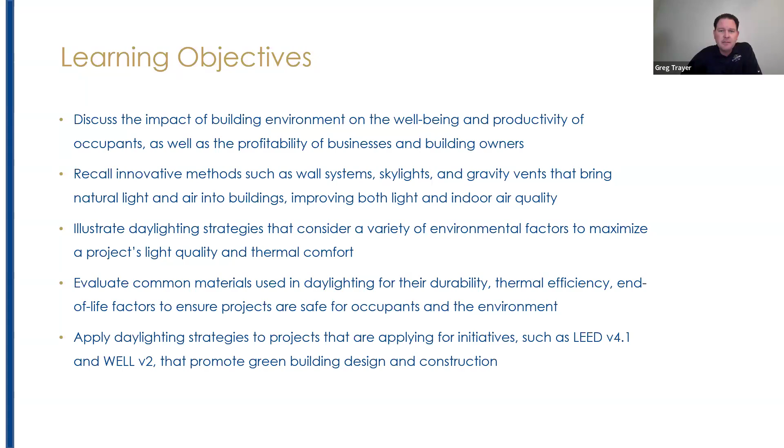Of architecture. So some of the learning objectives of the course: we're going to go through the well-being of the occupants and why that's important. We'll go through different methods of daylighting, from wall lights to skylights to canopies. We'll talk through different strategies and the materials that are commonly used with daylighting, and then lastly show the application, where and how it's used in day-to-day buildings.

As far as an introduction, when a building's first getting designed, a lot of the time it's focused on how big is the building, what's the layout, what technical stuff am I going to do, how do I weatherize that building—that's a lot of the primary concern. But what often is overlooked is the actual occupants of the building, whether they're working, shopping, or educating day in and day out. It's often thought of as wishful thinking or impossible due to the budget.

But when you think about the well-being of the occupants in the design process, it affects so many people, and we'll go into those benefits. Not only the occupants, but the owner, the business itself, the operators—there are so many benefits that a lot of people don't realize come from being in a properly lit space.

I think we would all agree nobody wants to go into work every day in a 10 by 10 space that has no windows, no ventilation, no fresh air. You want a nice, pleasant place to work in, and that's a lot about what this talks through. So as far as the occupants in the building, that availability of natural light, air, and ventilation are all things occupants want day to day in their workspace. So that's the main portion of what we'll go through now.

So there's a lot of numbers in here. Obviously, I wouldn't expect anyone to remember or memorize all these. Really, the big takeaway is the variety of benefits that come from natural light, and vice versa, what the lack of natural light does.

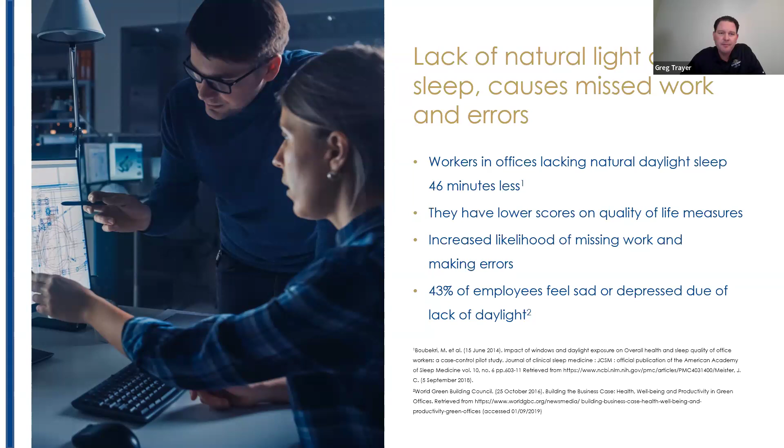When they've measured quality of life of employees, you'd be surprised how much the environment they work in contributes to that. And that's really tied to the impact of the circadian rhythm.

So, people say, why is the sky blue? Well, there's a number of reasons the sky is blue, but the sky being blue helps set your circadian rhythm. There's a reason your phone has a nighttime mode, right? It darkens it, takes it to more of a yellowish, orangish hue. That's your eyes and your body telling you it's time to wind down, time to go to bed. There's a reason casinos don't have any natural light in them, so you don't know what time of day it is, and it messes with your system.

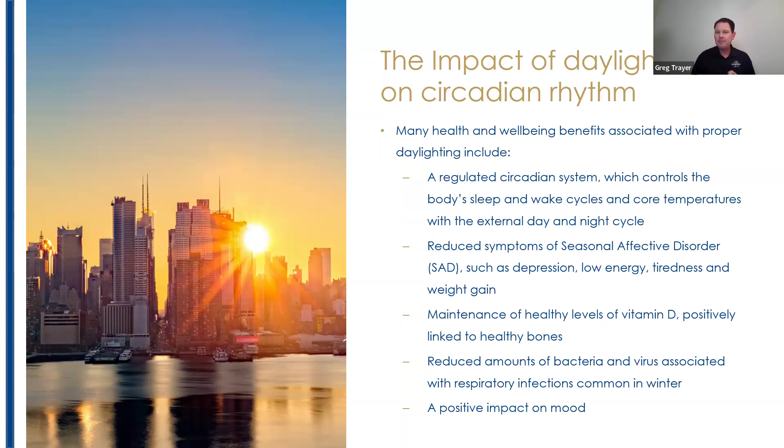So being on that right circadian rhythm is important to your day-to-day health and well-being, and working and living in natural light day in and day out will help keep that natural circadian rhythm in balance, which is really important to your health and well-being.

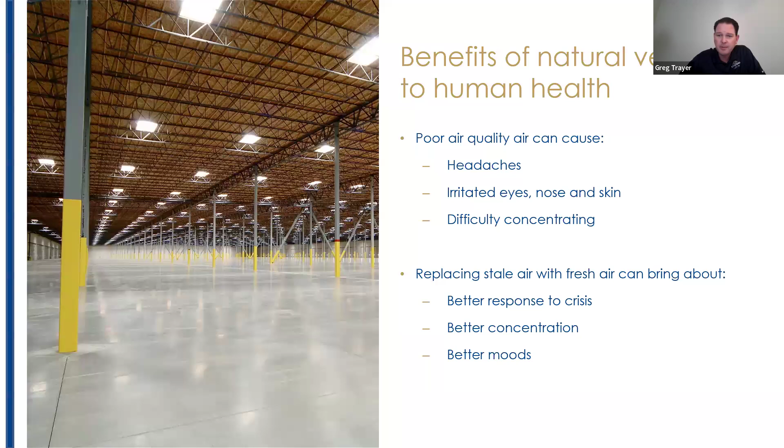The studies show that when you talk about air quality - so we talked about light and air - you not only have natural light, but you have the ventilation that comes too. When you're in a space that doesn't have quality air, you're more prone to headaches, you get irritation in your eyes and nose, you have difficulty concentrating because of dry and stagnant air. When you replace that with fresh air, you have a better response to crisis, you concentrate better, better moods. You have places that are really important, like hospitals, that have great air circulation and great light for a number of reasons, but one of them is it's really important that everyone is responsive and concentrating in those important environments.

And then also from a natural light and ventilation standpoint, from the school system - they have a variety of tests out there, whether math tests or reading tests, students are doing better, doing it faster when they're in spaces that are well lit and well ventilated.

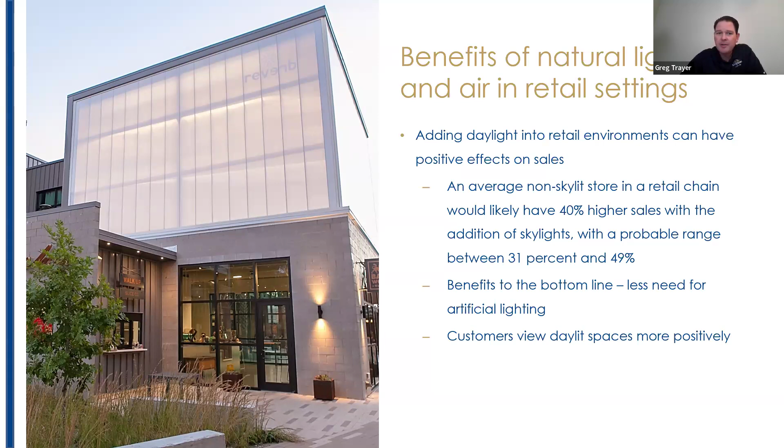So things you wouldn't probably think of when considering a retail space, but that does come into play. I know there's probably a little repetitiveness there, but it's important to understand that whether it's a school environment for students, a retail environment for shoppers, or just your workspace, across the board the benefits of well-lit and well-ventilated spaces are extremely important.

Going back to the original point, this is often overlooked at the beginning of the process. Our goal is to make sure you are educated, and your customers are educated, on all those benefits that aren't often thought of.

So the next section just goes into how do we do that? How do we bring light into these spaces? What are the things we should be thinking about?

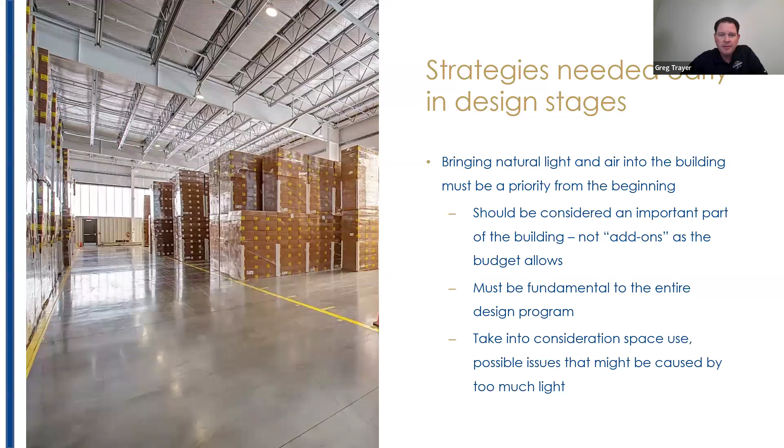Bringing that light and air into it needs to be a priority at the beginning, part of that early design phase. Later, as we wrap up, we can talk about some of the assistance out there for incorporating that into the fundamental design of your building, and the ways to do that.

So you have translucent wall systems. We're going to talk about the different types of applications. Your wall system is pretty self-explanatory — that's going on any of your four vertical walls, as opposed to canopies or skylights, which we'll get into later. With translucent panels you can have unitized panels, and we'll get into specific options later; this is more about the application. So where can I use it? First would be a wall system.

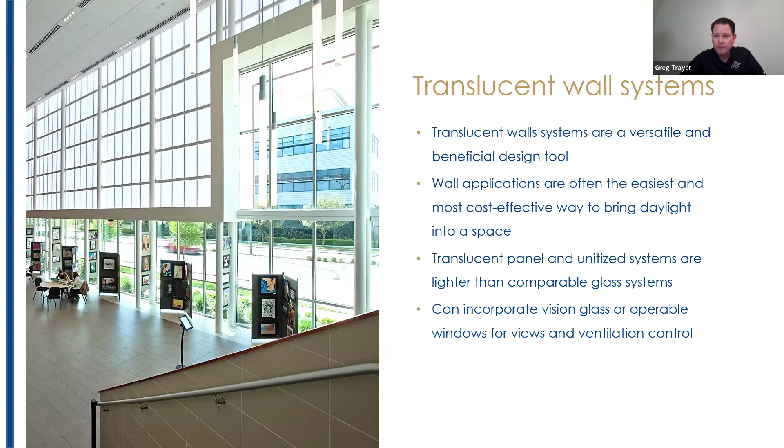Second would be skylights. That's probably the most common way people think of how to get daylight into a building — that seems to be the natural default. But as I just mentioned, wall lights are actually probably the most cost-effective way, and probably the most overlooked. Skylights are just the most natural way.

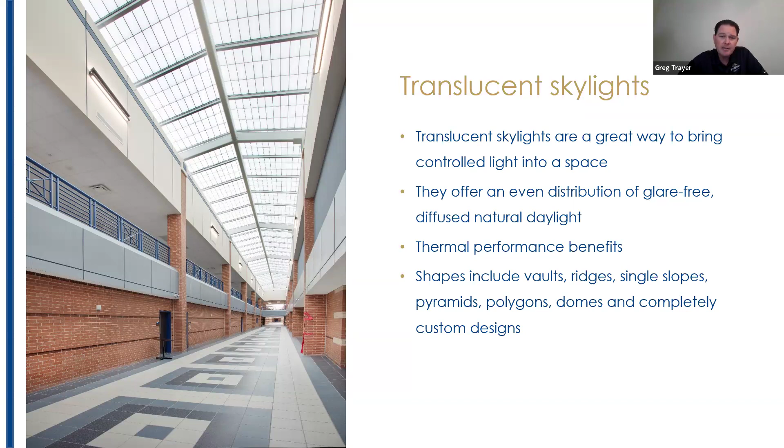Naturally, skylights are above you. There's a variety of options you can look for — vaults, ridges, single slopes, pyramids. So there's a number of aesthetic ways you can get light into the building using a skylight.

The other way is canopies and walkways. A lot of people think about the inside of their building with a skylight and a wall light into the building, but what's often not thought about is the entranceway or walkway into that building — out front of hotels, or at an airport when you're waiting to get picked up. All those places aren't actually inside the building, but are still connected to it.

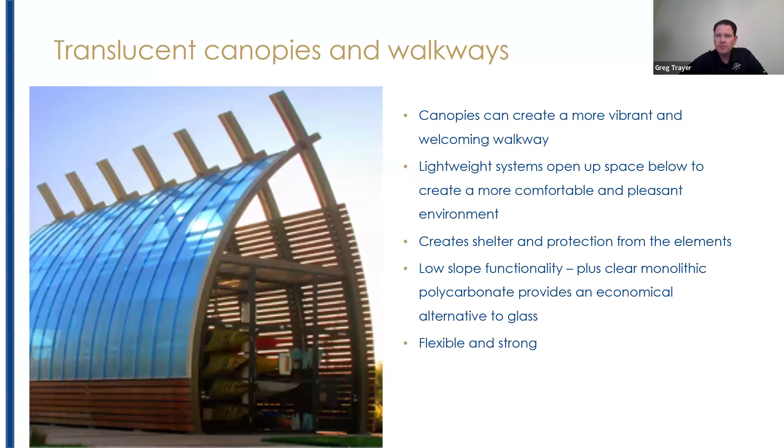There, it's actually less about bringing light in and more about managing that light in the system. But there's a variety of design options out there, and those are the three main ways you'll hear daylighting referred to: side lighting or wall lights, top lighting or skylights, and canopies and walkways. Those are the three major categories of daylighting you'll often hear referred to.

And then the other portion on top of daylighting is the natural ventilation, right?

So there's wall and roof vents. You have some that are operable, some that are inoperable. There's a variety of ways of getting natural ventilation in and out of the building, ensuring proper air quality. Having operable vents is important if you want fresh air, but if the air quality outside is bad, you want to block that out. So some people think it's just about getting air into the building, but often it's about blocking the wrong air from coming in. From a safety perspective, it could also be around smoke hatches and items that let air out due to a potential safety issue within the building.

So natural ventilation is the second part of that, and that's where it incorporates. In this section, we're going to talk more about what to consider and think about with natural light and ventilation.

So, daylighting strategy. I think we recognize that daylighting is still a bit of a niche area of expertise. When you talk about strategies, there's a lot of science that goes into daylighting - how to position your building, how to get the right light at the right time of day, how many foot candles, which is an expression essentially describing how much light is coming into the building. I'm not going to spend too much time on the details here.

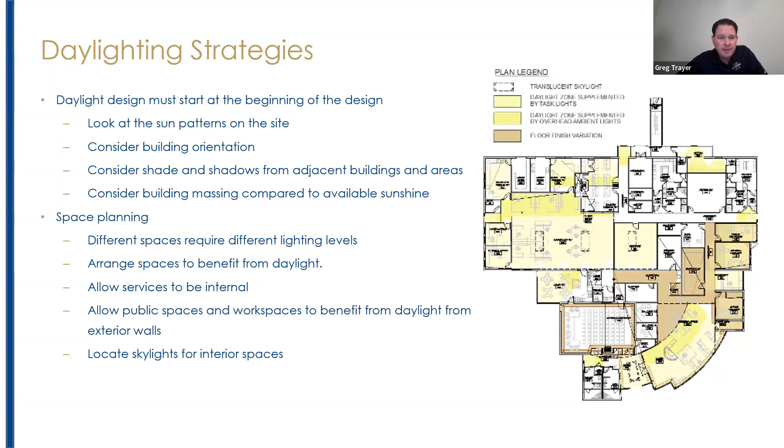The important thing to know, which we'll talk about a little later, is there are resources out there to help you. Some people are daylighting experts and some are not, but they want to learn more and incorporate it in. There are resources to help you as an architect or designer bring in strategies and daylighting studies. We'll talk about that a little later, but just know there's a lot that goes into it around the space and position that people don't think about, and assistance can be provided. There's also a variety of daylighting strategies.

I wanted to talk a little about how to do that, because the common way to bring light in is a window - a glass window that lets light in and gets you a great view. Then there's translucent daylighting, which gives you all the light and other benefits without the view. There are pros and cons to both.

A lot of people think it's one or the other - either you use transparent daylighting, with glass giving you that view and everything else that comes with it, or translucent daylighting, which gives you natural light without the glare and the view. But the reality is there are strategies where you can incorporate both. That's an example here of a view zone down below, because at the end of the day, people like to look outside and see trees and birds and all those good things. However, too much light can also be negative.

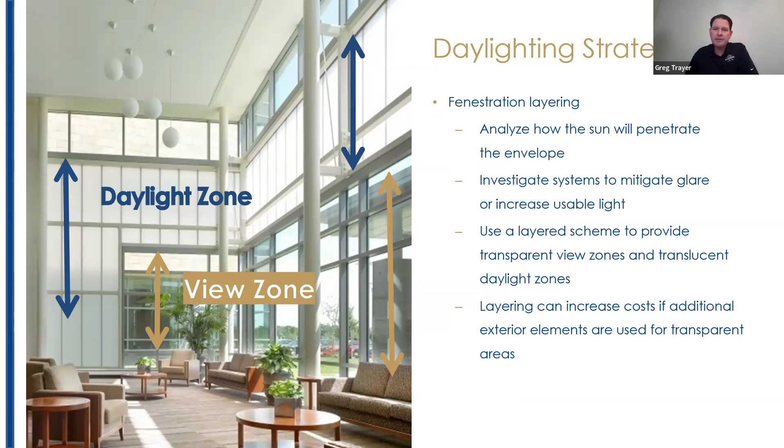So this is just showing where you can actually incorporate both transparent and translucent daylighting into your building with a variety of strategies. This talks about the modeling portion, so I won't spend too much time on it, but there are daylight modeling tools out there.

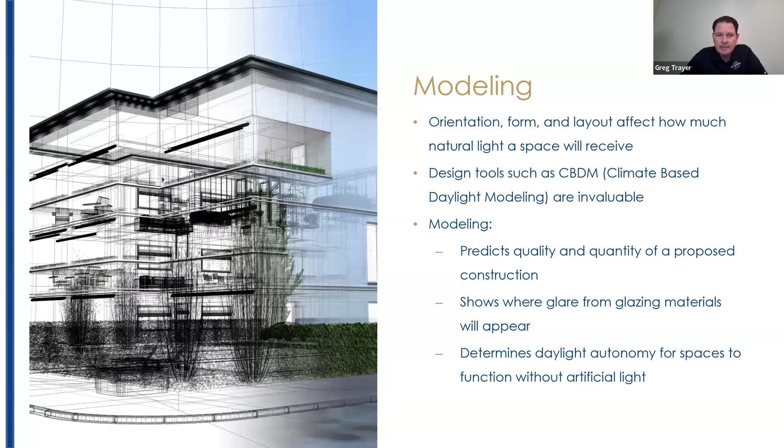There's some you can go out and find on your own - we'll talk a little later about that. There are obviously companies that can help and provide that for you as well. There is daylight modeling studies, software, and tools out there that can be used to really optimize the right light in your building when you're designing it.

The main reason translucent daylighting started becoming popular is because, as I mentioned, the default is transparent - the default is glass, and there's a lot of benefits to it. The downside is things like glare and heat spots. It's like walking in the mall and standing in one of those kiosks getting light, and it's just a heat spot right there. If you're in an office trying to work, you get glare on your computer, glare on a TV. So there are pros and cons to it.

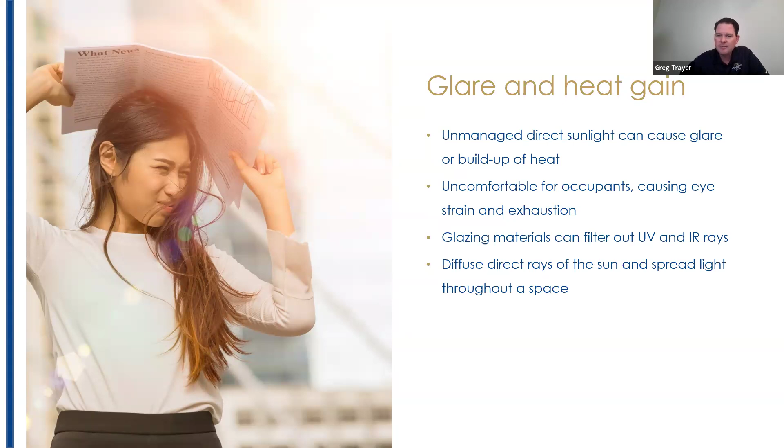The downside to transparent is often tied to that heat, that glare, those sunspots that are difficult to navigate. The main real benefit of translucent daylighting is that it takes the light, diffuses it, and evenly spreads it throughout your building. So you don't get those heat spots, you don't get that glare, you don't get those sunspots. It makes for a still well-lit space that feels like you're getting natural light, but without some of the negatives that come with direct sunlight.

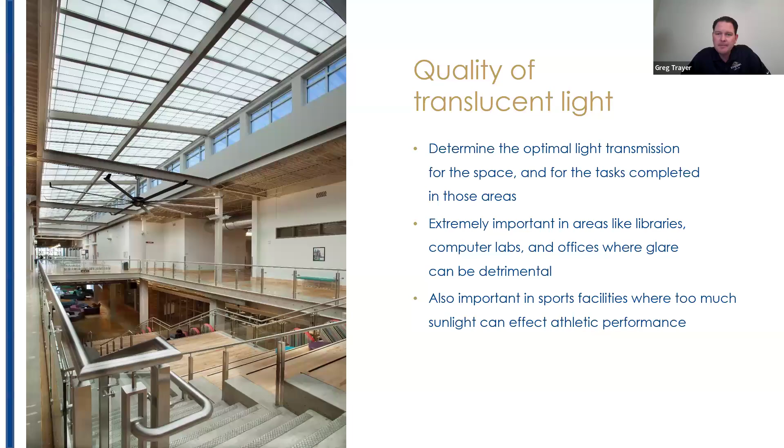So insulated glass is the most common one. Years ago we've gone to double pane glass - that's the standard now, so two or more panes. The benefits of glass is that it allows the occupant to see outside, see the scenery, see everything that's out there.

The downside is the glare, which can be detrimental depending on how you're using that space. Glass is pretty long lasting - there's maintenance needed, but it's a long lasting product. Standard glass is recyclable, and recyclability has always been important, and becomes more important to everybody - owners, occupants, architects - making sure we're leaving this earth better than when we came, and having recycled content is important. So standard glass is recyclable, but when you get to low-E glass, that generally cannot be recycled.

The second option, moving into the translucent space, is fiberglass or FRP. You'll also hear this referred to as a sandwich panel. It's actually two fiberglass sheets bonded together to an aluminum I-beam structure. You can see in this picture that grid pattern of squares or rectangles, probably 12 inches by 24 inches. Imagine an aluminum beam with structure every 12 or 24 inches, and you adhere a sheet of fiberglass on the bottom and on the top - that's why it's called a sandwich panel. What you're doing is reducing the glare, reducing hot spots, but still letting the light in.

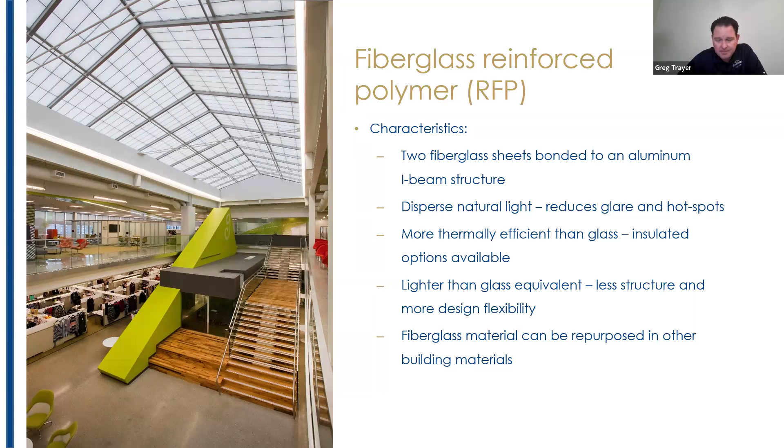It's more thermally efficient than glass, as you might expect, and it's lighter than glass. The fiberglass itself can be repurposed, but the actual material is not recyclable.

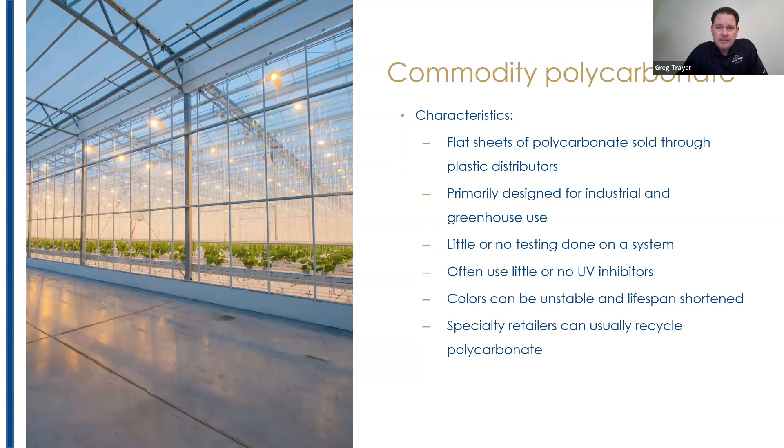It's got a niche use, but the more common type of polycarbonate is the architectural grade polycarbonate. As opposed to one single thick panel, it has a more similar appearance to that sandwich panel - it's actually a two panel system. You'd have a 10 or 12 millimeter piece of polycarbonate, a metal frame, and another 10 or 12 millimeter thick polycarbonate. So it's a two panel system that creates an air cavity in there.

The reason for that air cavity - usually that panel system is somewhere between 3 and 4 inches wide - allows for some sound control, some insulation, so it allows a bit of flexibility. This product is used very similarly to your fiberglass product - similar applications: wall lights, skylights, canopies. They just offer a different aesthetic look, different design options and flexibility. Polycarbonate generally adds more design flexibility. The other thing you'll hear is that polycarbonate is essentially a fancy name for plastic - it's plastic, and a lot of times people in their mind think plastic is cheap.

Polycarbonate is actually used in some pretty high technology items like eyeglasses, headlights, and bulletproof glass. So some people mistakenly equate polycarbonate or plastic to being cheap or not durable, when in fact it's quite the opposite. So those are your four main options for daylighting: the transparent, which is your glass, most common, and then the translucent, which is your fiberglass and your polycarbonate.

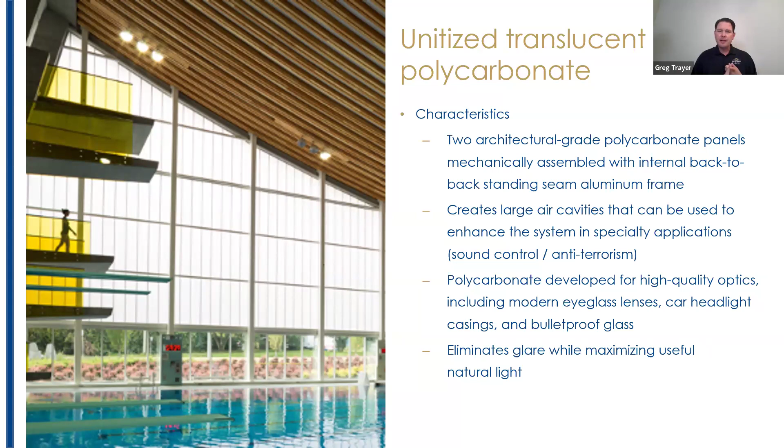What this allows, because those two panels can be removed. So fiberglass, that sandwich panel, when manufactured and sent out, that is one piece—two panels adhered together, making it one piece of a system. So you cannot do this, unfortunately, with fiberglass, but you can do this with polycarbonates, where you can actually remove the outer layer, the outer skin of that.

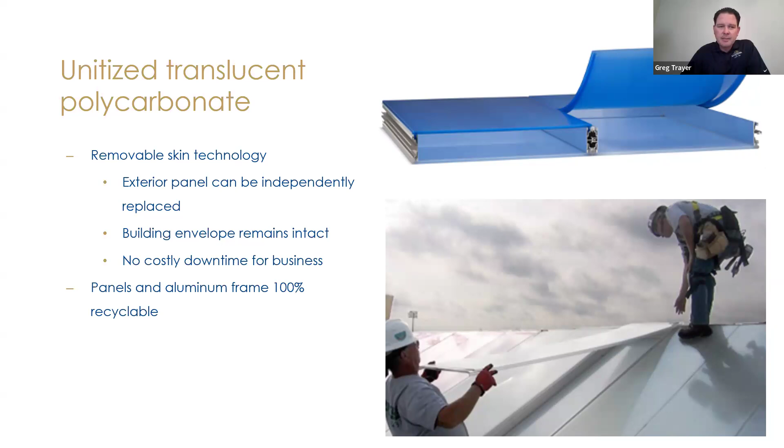So the translucent system—we talked about there's polycarbonate and there's FRP, and some of the benefits that come with that. You can get long spans. You do have insulation options, right? There is the ability in those panels—they are either a sandwich panel or a two-panel system that you can put insulation in there.

Now, the whole point of a translucent system is to let daylight in. So the more insulation you put in there, the less daylight comes through. So it's an option, but you also want to make sure you're balancing the reason you're using translucent daylighting. But there is, at the end of the day, flexibility, which is ultimately what you want. That includes not only insulation, but sound transmission.

So you could have a building, if it's some kind of music or dance space, if you're sharing wall space, you could have one wall with increased sound transmission blocking that you don't have to have on the other wall because that wall may be too open. So you have design flexibility around insulation, sound, also safety and security. These products can be used where you have to pass certain tests, like 5-minute forced entry if it's on a military base. So these translucent systems give a lot of flexibility for any type of building you might be designing, whether that's sound, security, or insulation. There's a lot of options out there.

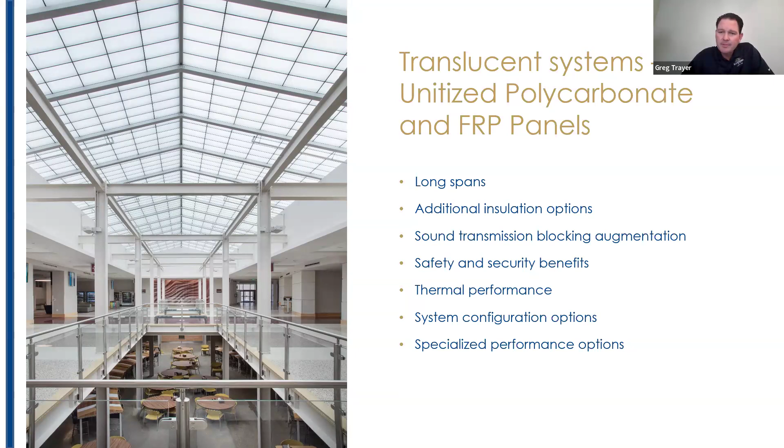You can get quite long spans out of these, and aesthetically people like that because there's less break, fewer supports. Also from an installation perspective, it helps. With the polycarbonate, you can span up to about 40 feet; with the fiberglass, you're looking at about 20 feet. What kind of horizontal supports you need will vary based on where you install, with wind loads and snow loads and everything else. So there is some horizontal support on the back, but from the actual panel, before you see any panel break, you could get runs with poly at 40 feet, and with fiberglass to about 20 feet.

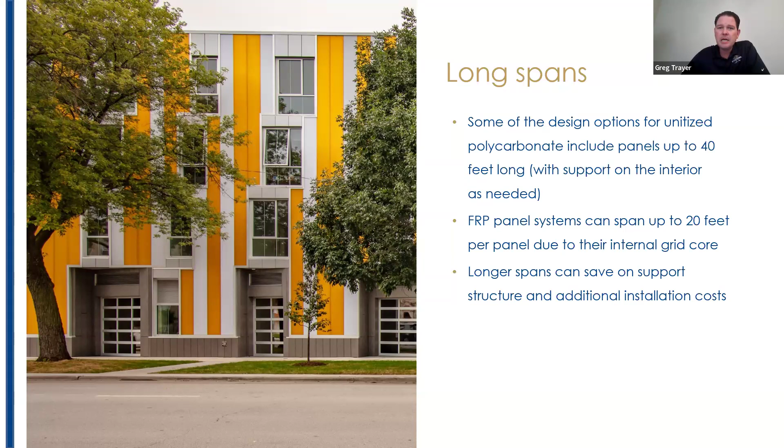A lot of people ask about our R value. Translucent daylighting does not use R value, it's a fenestration product, so it actually uses U value, which is essentially just the inverse of R value. You'll see a lot of U values for translucent daylighting between 0.2 and 0.3, which if you convert that to R values is around a 3 or 4. With U value, essentially the lower the better.

So our standard might be a point. There is really no standard because it takes into account how thick your system is, and whether you're using a white panel, a blue panel, or a green panel. But you're looking at somewhere around 0.25. If you include insulation, you could actually get all the way down to a 0.07. Not typically something we'd fully recommend because it reduces your light transmission, but there are options. I think that's the big thing to keep in mind.

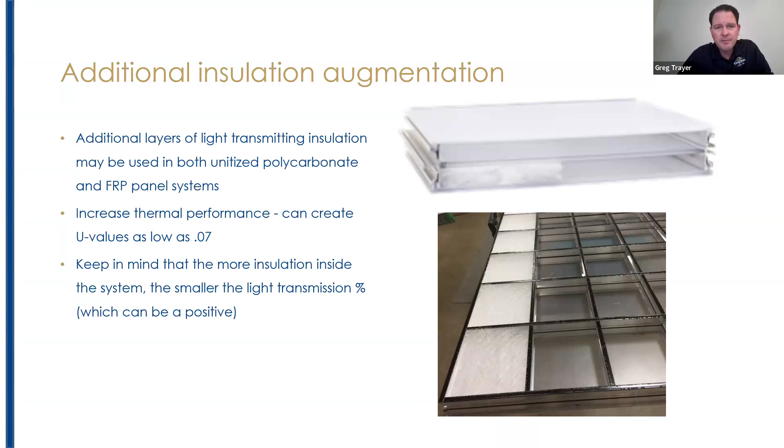So when and if you guys ever have a job with translucent daylighting, hopefully you do, all that information is readily available either from your manufacturer or we'll talk a little about the NFRC. That information is out there, and we can provide it for you if you need to match and meet certain thermal performance.

Sound transmission blocking augmentation. Like I mentioned prior, we can have additional layers of polycarbonate that can reduce sound transmission. We don't see this a lot, it's not a real common occurrence, so it's not something day to day you're going to deal with in the translucent daylighting world. But again, it gives you options and design flexibility. I've seen it more with music or dance studios, something like that.

Just know that option is out there if it's something you need. Same thing with military use. We'll see a decent amount of polycarbonate and fiberglass used in military buildings and military plants. You can utilize the system - I mentioned the 5-minute forced entry, there's blast ratings, and a variety of testing that gets done and is usually required on military bases that we have the ability to provide with the polycarbonate or fiberglass.

I wouldn't worry too much about the real nitty-gritty details of this right now. I would just make sure you understand that it's out there, and when that time comes, there are resources to help you design the building as needed. I don't know how many of you work with military buildings or facilities, but if you do, there are options out there for you. Thermal performance - this talks about the wide range we have with the insulation that can be added.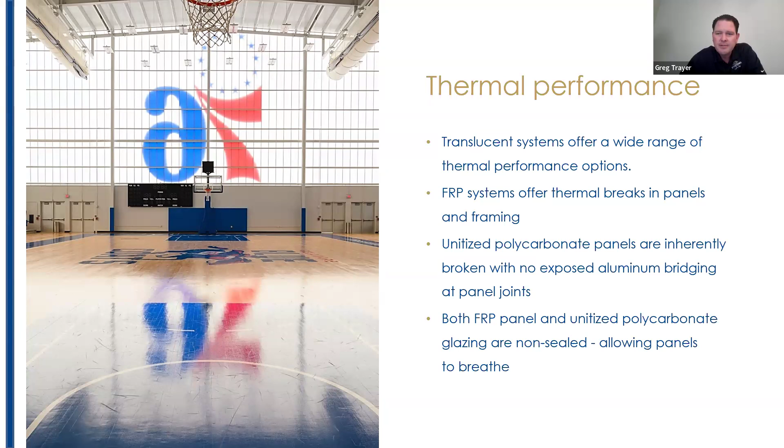You have quite a bit of design flexibility. The other thing to note with FRP panels and polycarbonate panels is they are not sealed, so when those panels go in, they're not sealed throughout each of their seams, which allows the panels to breathe. It is a thermally broken system - the FRP system has thermal breaks on it, and the polycarbonate doesn't have exposed aluminum, so it's naturally already thermally broken. So if that question comes up, that's something we have.

You'll often see this product get used quite a bit with sports, whether that's professional, college, or high school. They want to bring their team colors into the gym or practice facility. So like that picture down below, if that was the Springfield Red Hawks, they'll use some red panels to bring a little school spirit to the building. That's something you see a lot in sports, college, and high school facilities.

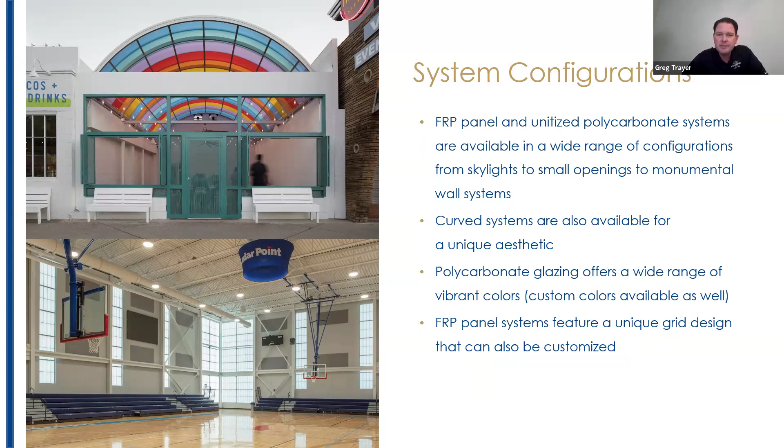Specialized performance options - if there's one thing to take away, it's flexibility. There's flexibility in these products. If you're down in Florida and need to be in an HVHZ zone, which is high velocity hurricane zone, there are products that can meet that. If you need Class A roof construction, there are products for that. We already talked about forced entry, and you can mix glazing options like we discussed - incorporating glass with polycarbonate or vice versa. So the design flexibility is there. If you need certain levels of performance criteria, I won't say there's always an option, but in almost every situation there's going to be a design option for you, depending on your qualifications.

So the next section, we just talk a little bit about codes. And admittedly, this is not really my area of expertise, so if we have more detailed questions, we may follow up.

Basically, what this is telling you is that LEED certification is very important. You have a variety of ways to get LEED points on your buildings by using translucent daylighting, whether that's polycarbonate or fiberglass - these are just some examples. Obviously those are on a job-by-job basis, and there's help that can be provided if that's important to you. But the takeaway is there's a variety of ways to get LEED points with translucent daylighting.

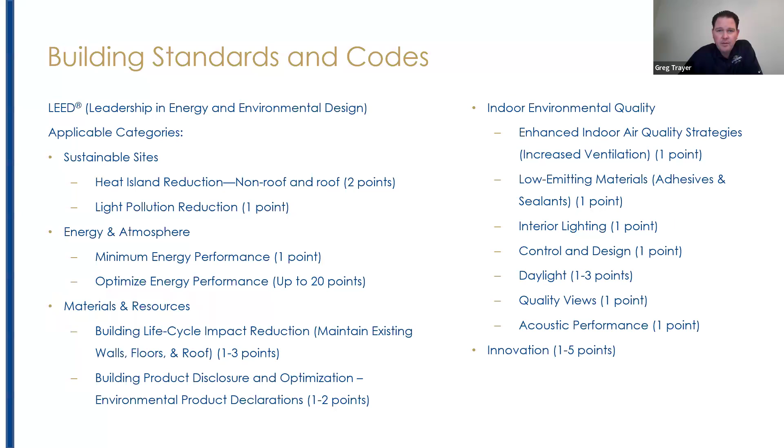Also, the Well Building Standard and BREEAM - I don't know how familiar everyone is with those, and like I said, not my area of expertise to be fair. But there are a variety of ways that translucent daylighting can fit into these categories as well. So just know that, if that's important to some of the designs you guys are working on.

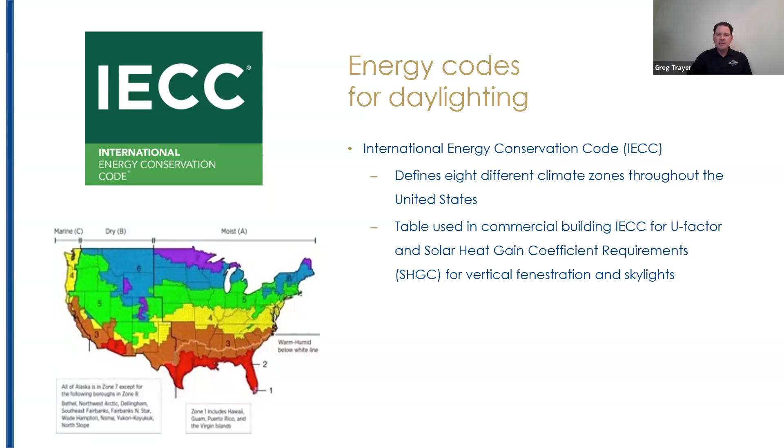And then the IECC, which is International Energy Conservation Code - these are things looking at your U factor, which is the inverse of your R value, but it's your thermal performance. Also, it's looking at things like solar heat gain coefficient. And what the IECC does is mandate a third party to certify all that testing.

So the NFRC, the National Fenestration Rating Council, is the go-to third party that does all the independent studies and testing of translucent daylighting - whether that's U factor, solar heat gain coefficient, or visible light transmission, those are all measured by the NFRC. If you need NFRC testing, you can find that on the NFRC site. The site itself, I'd say, is not the most user-friendly, can be a little difficult to navigate. I would go toward your manufacturer who's going to have what you need more readily available. But just know that NFRC is essentially the third-party council that regulates and tests all translucent fenestration products.

And then the last section here is really around case studies, which at the end of the day are pretty pictures showing everyone how this gets incorporated and the different design options you have.

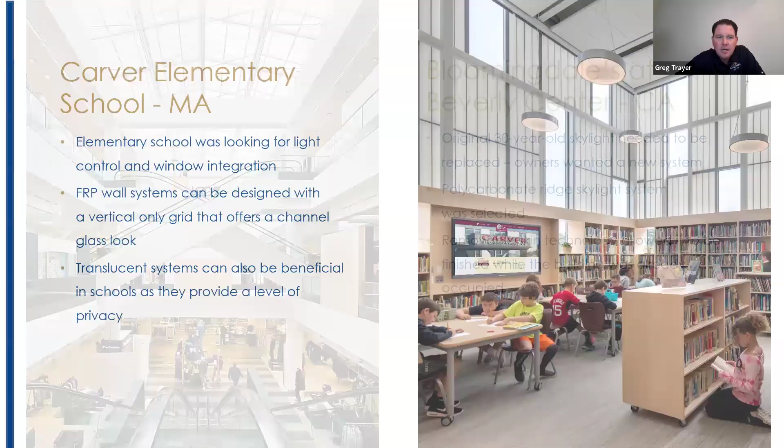This is a school, and this is one where we talk about incorporating multiple ways of daylighting. This is predominantly fiberglass, FRP - those are the vertical panels you see there. But you also see there's glass on there as well, so there's some transparent elements that, in this situation, let kids look out and see if it's snowing or raining.

But it reduces greatly that kind of glare that we had talked about. So this is just an example of some mixed use options that are out there.

A lot of times it gets used as a center point of a building, of a town center, because when you look at it, it almost shows up as like a beam of light. So you turn the lights on inside, and it really attracts people to it.

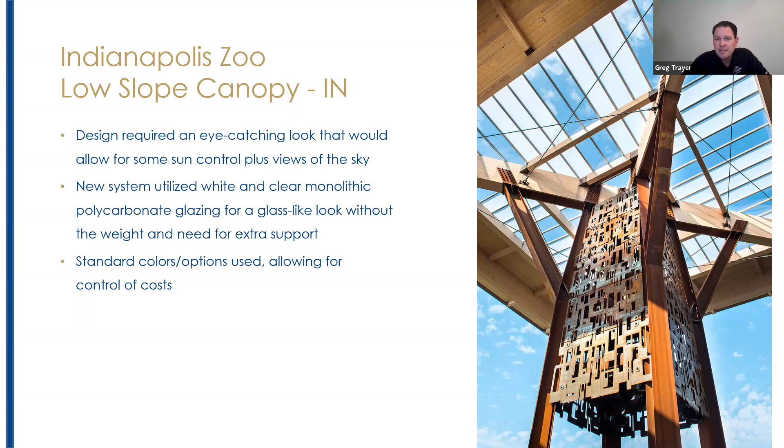This is another mixed use job, kind of a unique one from Indianapolis Zoo. This is a low slope canopy that mixes the types of glazing—some you can see out, some you don't. Again, options and different aesthetics, different design flexibility that it gives you.

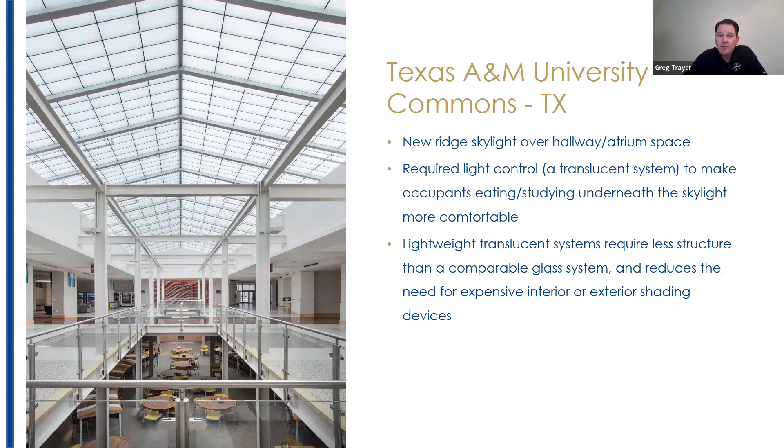This is a community center, so it's got kind of a walkway around the end. You'll see those spans there on the translucent daylighting. It looks like you have one horizontal support there, and then on the outside, those panels.

You see someone walking—let's assume that person's somewhere between 5 and 6 feet. So that span is probably around 15 feet. You're looking at one straight panel, 15 feet, somewhere in that range, maybe anywhere from 15 to 20 as it slopes up, and then you'll see one horizontal support there.

But it allows you to see the taper of the wall too, so it gives you a little bit of flexibility there. Those products come out already pre-cut, so to get that look you see out there—let's say the tallest one's 22 feet—those aren't all sent out at 22 feet for an installer to cut down. They're cut, made, assembled and fabricated to the exact height and slope in a factory, then they come out, which makes ease of installation very high.

So that is all that I had. I wanted to make sure—I apologize if that seemed a little quick, but I know some of you have sat through 3 of these already, so I appreciate that. And I wanted to make sure we left time for any other questions you might have. But I think the takeaway for me, if you were to walk away at the end, late on a Friday after sitting through this, is design flexibility.

So translucent daylighting is going to bring natural light into your buildings. It's going to do it without glare, without heat, without sunspot—giving you that natural light without the negatives that come with direct sun. You have a lot of design flexibility in what you can do with it, both from a look, a color, a bend, a curve, and a variety of options, whether that be a polycarbonate, an architectural grade polycarbonate, or fiberglass, which are the most common.

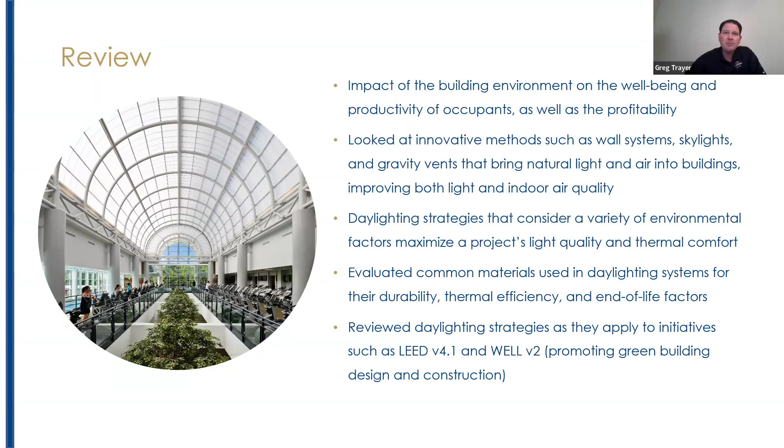So design flexibility is out there, and the support is out there—if you need help, we're here to help. No matter what your scenario might be, whether that's a school, retail, or military, there's options to be had out there. So with that being said, that concludes the formal AIA portion. I can take off my AIA hat now and put on my Kingspan hat a little bit.

I think we have about 15 minutes left. So for any questions, I'll stop sharing so I can, Daniel, maybe at least see the group if there's still a group out there to be seen. But any comments, questions, thoughts on some of that material? Again, I know it's the end of a long day, I know it's a Friday.